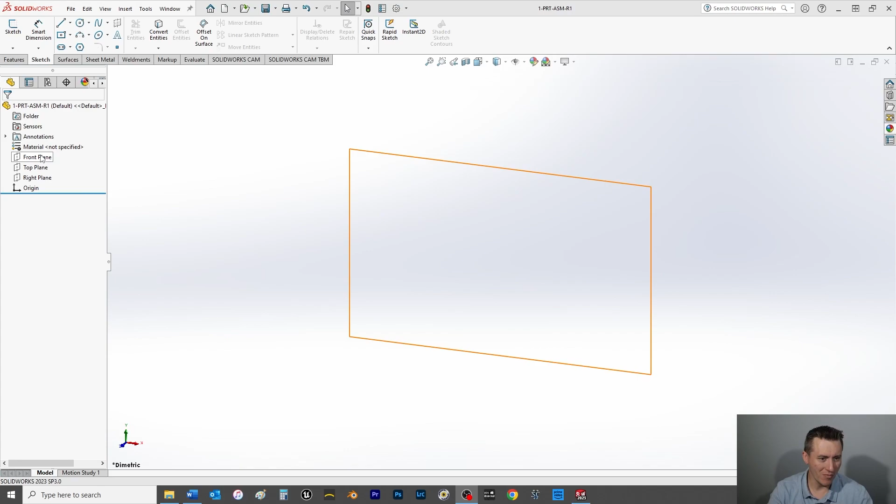For this, I'm going to choose the lovely front plane to start. This isn't going to matter for which plane I start on, because the orientation of the part really doesn't matter since it's an end-all be-all part rather than a part going into an assembly.

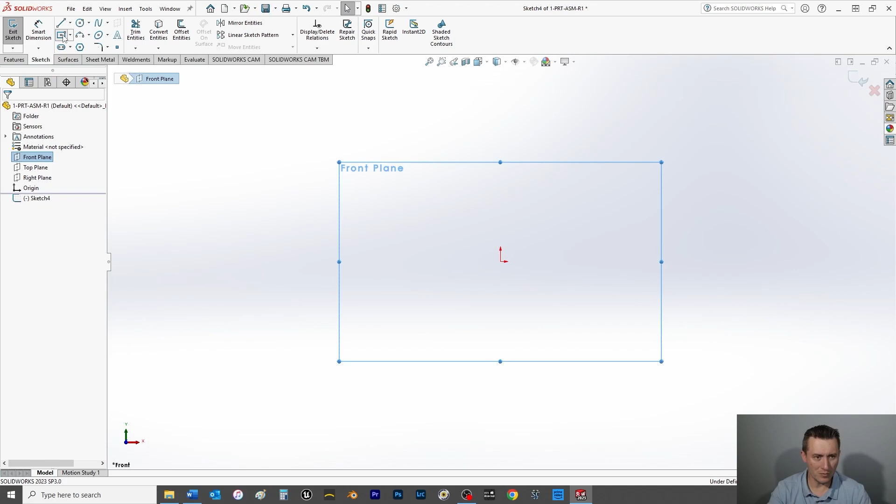So with that, we're going to start with a bounding box, or technically a cube, and we're going to choose the dimension, lucky number 7. I'm going to press the control key to make the vertical and horizontal line here equal. I love using minimal dimensions when possible.

There are other situations where it's more complex, so it doesn't quite make sense to do equal relations. You may want to do different dimensions and have them drive off of each other. There's a number of different ways to do it depending on what your part design is and what it requires, and being able to keep track of when you change this, what else is going to change, and is that change predictable to your part. That's the big thing to keep in mind when making a solid part, and even further, the assembly.

But in this case, this one is purely for fun, and arguably I don't think you'd do it this way. You'd, again, make each individual piece as its own part, and then throw it together in an assembly file. So, we got our first square part here.

We're going to turn this now into our cube or bounding box. And I'm using the term bounding loosely, because I can obviously make anything go outside of this, but we're just using it as kind of our cube frame of reference.

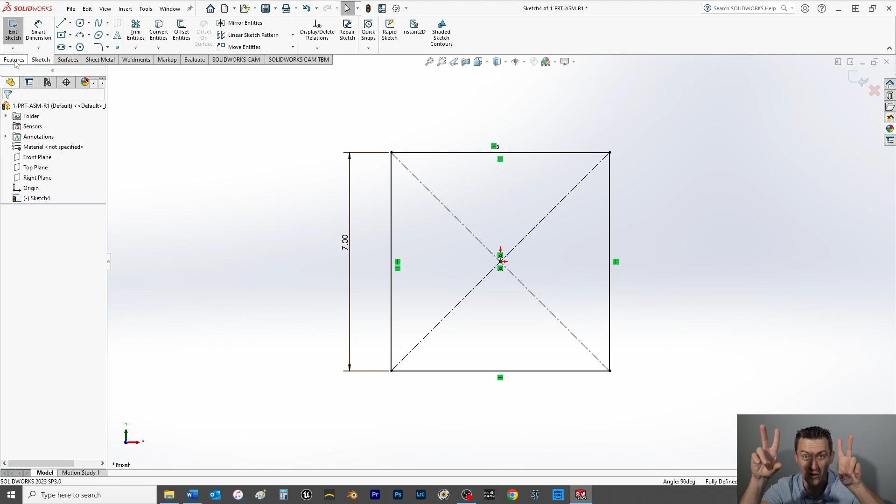So I'm going to go into the Features tab, I'm going to choose Boss Extrude. In my end condition, I want to be mid-plane. By default, it is probably going to be blind, which is okay, but I want it mid-plane because I want the center of this part on all planes, front, right, top, to be in the center. We'll do 7 here, so it's a 7 by 7 by 7.

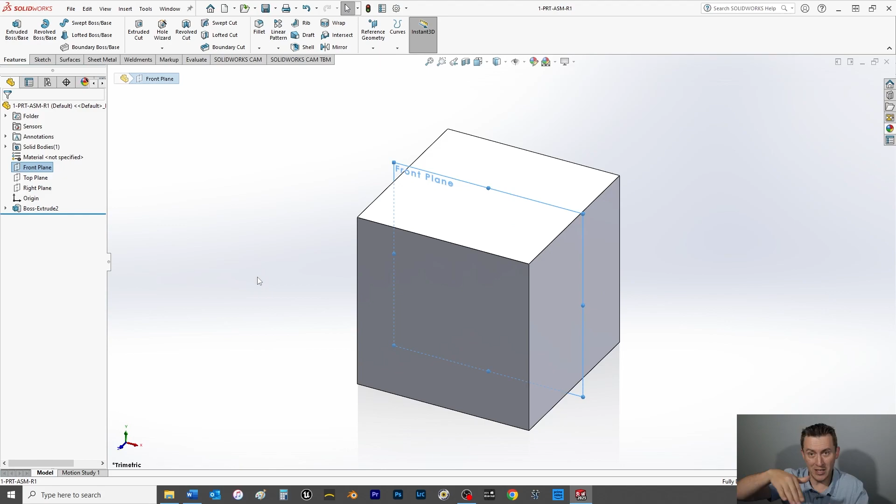Save it. And now what we're going to do from here is cut from the inside out. And we'll do that by choosing the front plane, because the front plane, the top plane, and the right plane are all technically in the middle of this cube, because of extruding it mid-plane and where I drew the sketch and the center point relation of the rectangle.

So now I'll bring the front plane, hit Control 8 to bring it normal to. Now it looks like I'm going to draw on the front face of this cube, but I assure you I'm not. So we'll go to the Sketch tab, click Sketch.

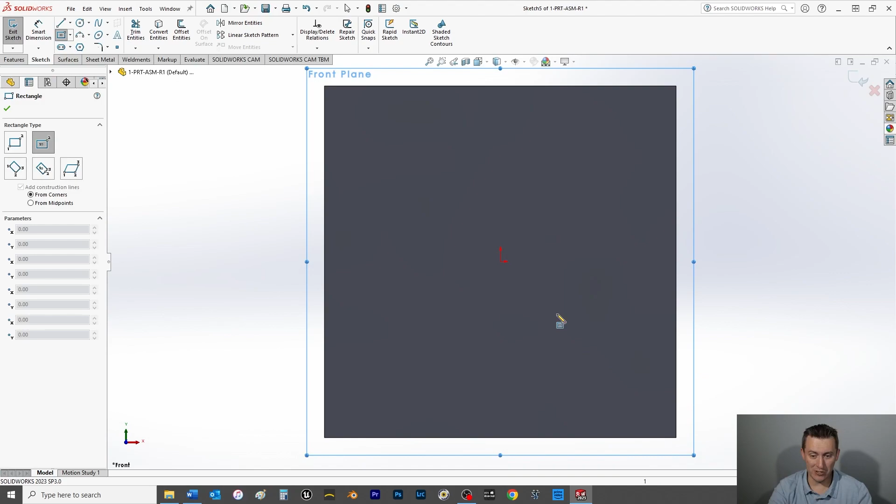We're going to choose another center rectangle. We want the origin again, want everything centered off the origin. And for here we're going to do an offset of, say, 0.375. How about that?

And again, I only want to use a single dimension to drive all of these cutouts, because we're going to have a cutout on the front plane, the top plane, and the right plane to hollow out this cube, so to speak. So what we can do is, again, our lovely control key, we'll choose this vertical line here, choose this horizontal, and then over here in the properties, under add relations, we want to choose equal.

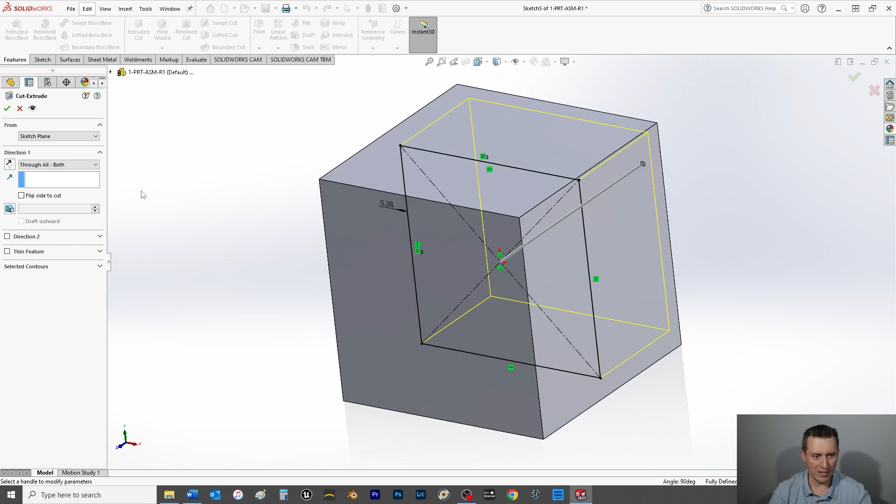Click OK, we have all black lines, a fully defined sketch. Down here in the bottom right, you'll see something that says fully defined. You want that always. Now I'm going to go into the Features tab and do an extruded cut. This is again in the middle, and I want to choose the end condition through all both, so it cuts out both sides.

There's a number of different ways you can do this, this is definitely a quick way, and I'm not concerned about what it would potentially cut through on the outside, because again, everything else I'm going to create is inside this cube.

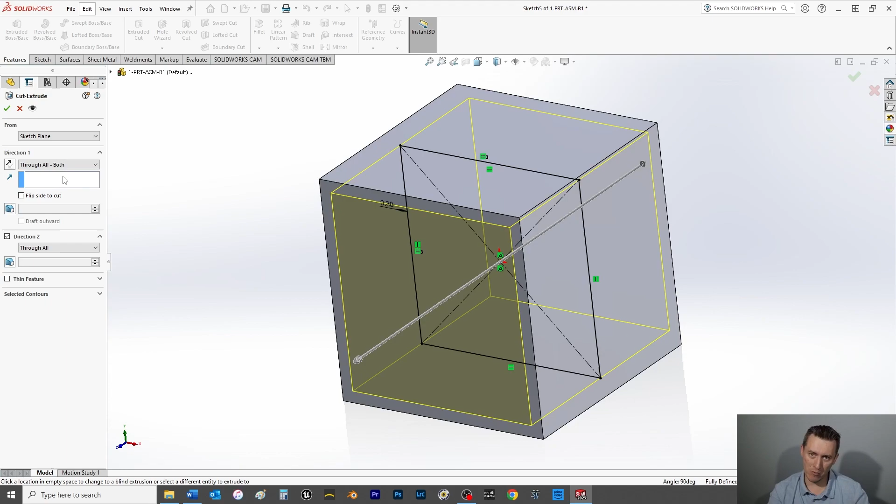Now, if you were concerned about what it may cut through on the outside, you may want to choose a different end condition, say up to surface, which is going to be highly accurate. It stops right there, goes no further, no less, right at that surface, and it will cut out that side.

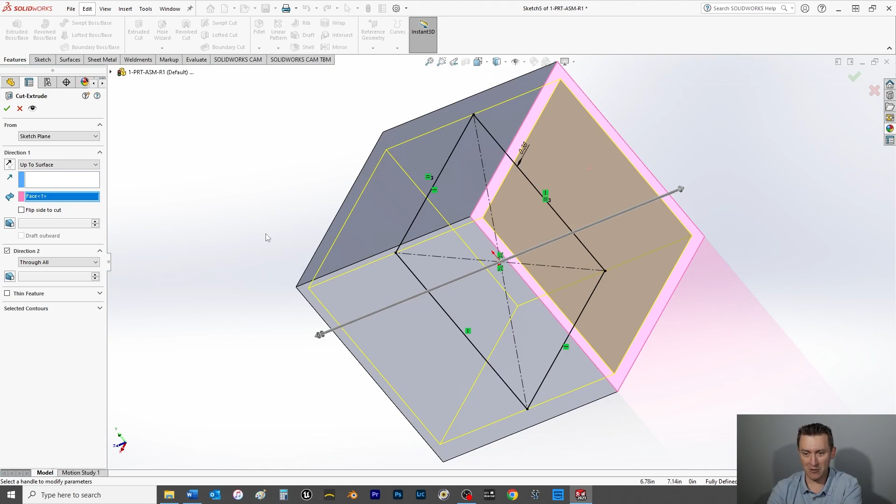When you do that, you're going to have to do one of two things: either close out and consider that one feature, then go back in and do it again going the other direction, or in this case choose direction 2, the same up to surface condition, and then choose the other side. Now it's going to cut through both sides, front and back, with one feature of cut extrude.

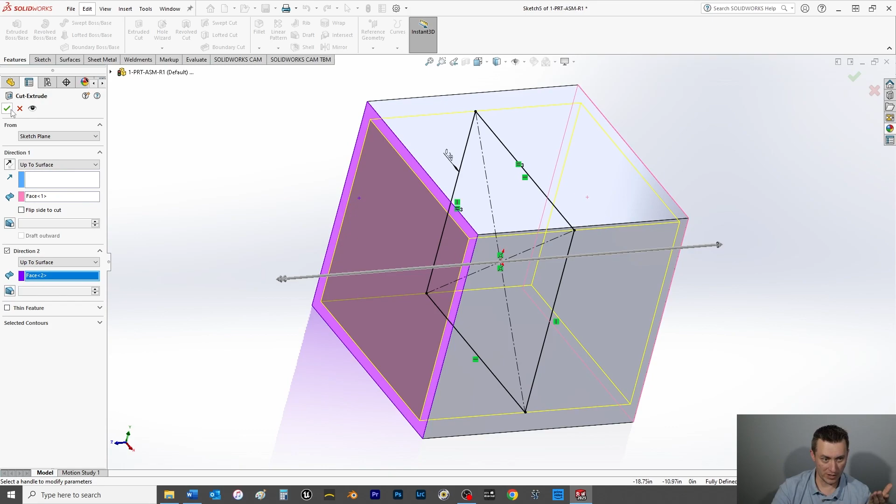So for this one, I'll do it this way just to show. I'm going to press the space bar and bring the front plane normal to. There we go, we've cut that out that way. Now I'll hit the space bar and bring it isometric.

One thing let's do here now is take the second sketch we created, which was absorbed by our cut extrude feature, and rename it. So sketch 5 here, even though it's only our second sketch, I'm going to click on it once, then slow click twice to get the rename, and we're going to call this master offset sketch, because this sketch is going to drive all the other cut extrude sketches.

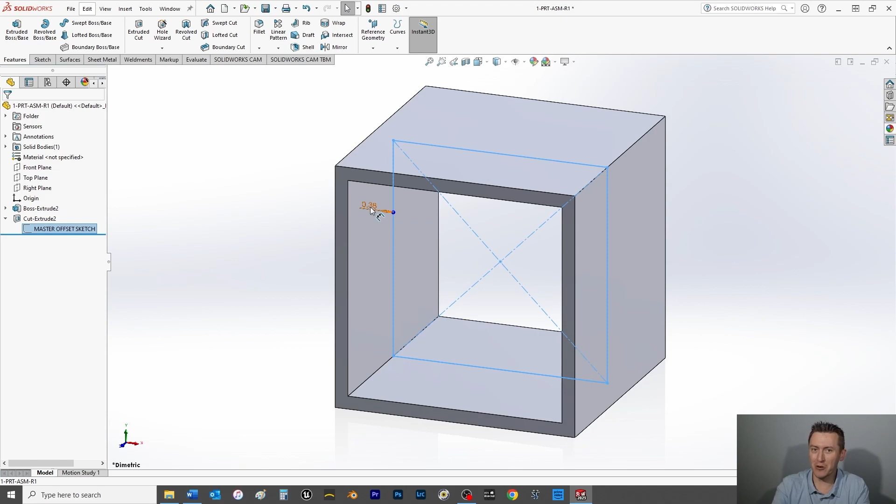That way, when I change the dimension of the cube, it drives the offset from this sketch, and everything changes proportionately and predictably. I won't have to go into each individual sketch for the cut extrude and change the dimension, even though there's one. I don't want to have to deal with that if I don't have to. So now we'll save it, of course.

And the other thing is, let's leave it hidden for now so it doesn't get too messy. Next, you can either do the right or top plane—we've got to do a sketch on both. So let's go right plane next, Control 8 to bring it normal to, then go back to our sketch tab.

Choose a center point or center rectangle, drag out, click OK. Now what I'm going to do is, while I'm in this sketch, right click over here in the features tree on my master sketch and show that sketch. So now with clicking the center scroll wheel, I can turn and manipulate the part to get a better view of that master sketch.

From here, control key again, I'm going to select that vertical line from the master sketch, and select the vertical line from my current sketch. Over here, under the relations, I want to make that equal. You can see where this is going.

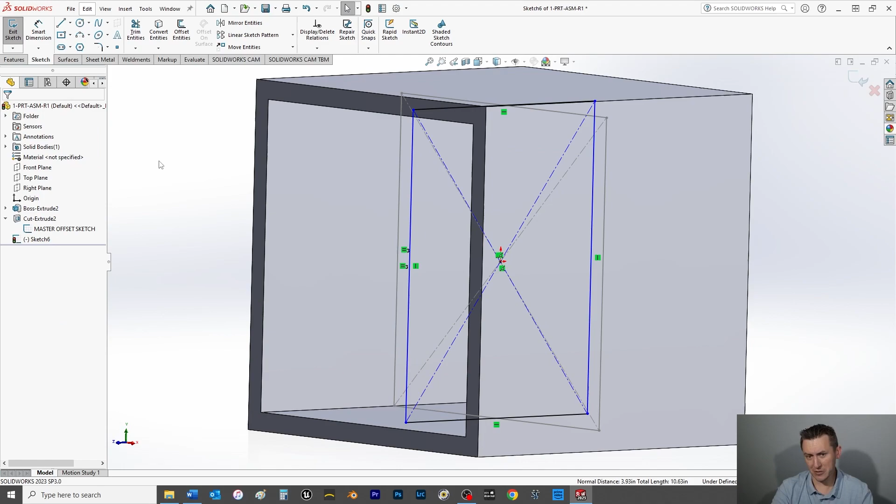Now I'm going to hit the space bar and bring my sketch normal to again, because I don't need the master sketch anymore, though you could arguably use the horizontal line of the master sketch and the horizontal line of this sketch and make those an equal relation too. I'm just going to do the exact same thing I did for the first sketch.

We've already got this one equal here. It's underdefined—there are no dimensions, this is purely relation based—but that's going to fully define it. So I'm going to press Control key, select my vertical line, select my horizontal, and again add the equal relation, then close the dialog on that. It's fully defined based on the origin, the center rectangle's parameters, and the constraints that it puts in place.

So from here, now I can do features, the extruded cut, and this time I'm going to do end condition through all both, speed it up a bit, and click OK. Just like that, we're almost done hollowing out this cube boundary box.

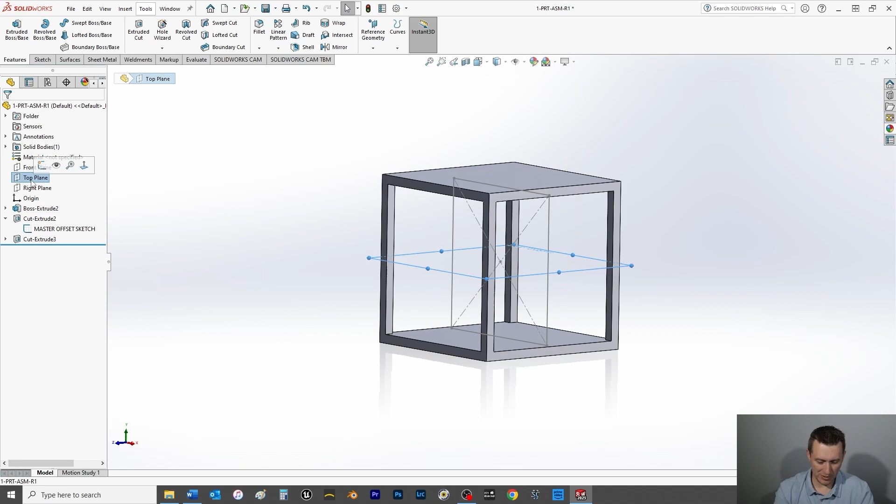So now I'm going to do the top plane, Control 8 to bring it normal to, choose a sketch, and do the center rectangle on the origin. Then here again, I'm just using my mouse wheel, pressing it in to manipulate the part's position. We're still in this sketch.

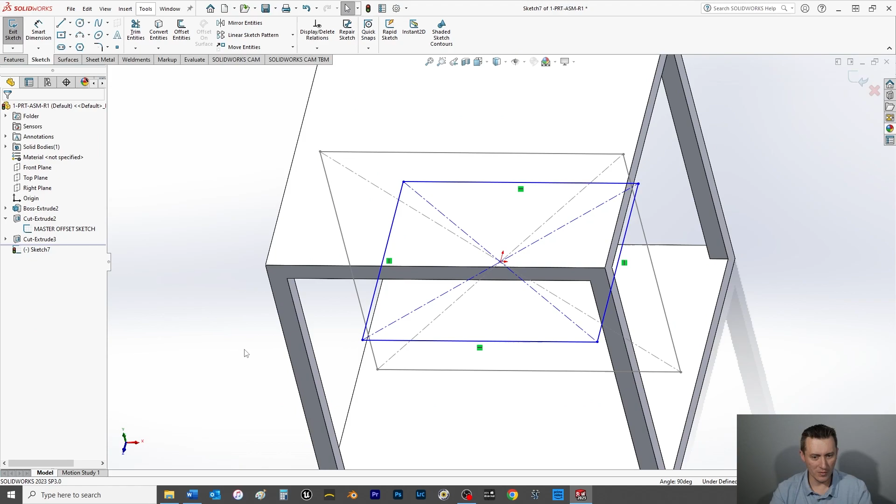I'm going to press Control, grab the master sketch vertical—oh, we grabbed everything. So Control key, grab the master sketch vertical, grab my current sketch vertical, close out of that for a moment, and edit the sketch.

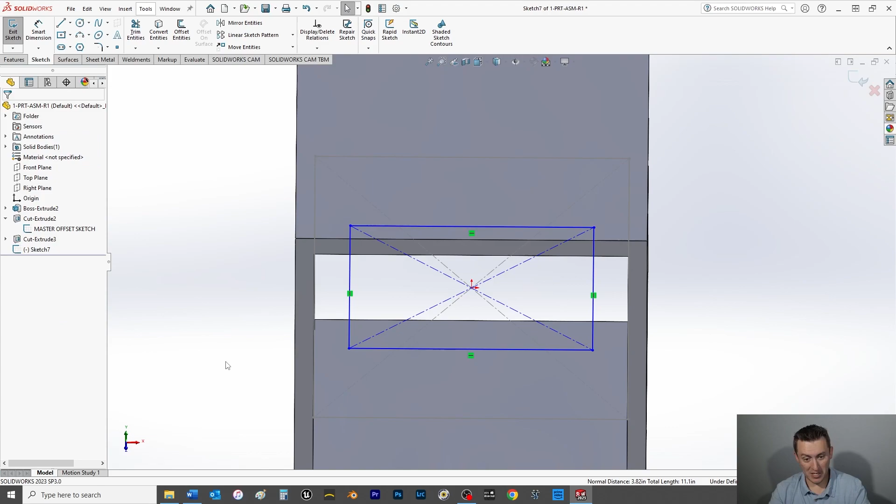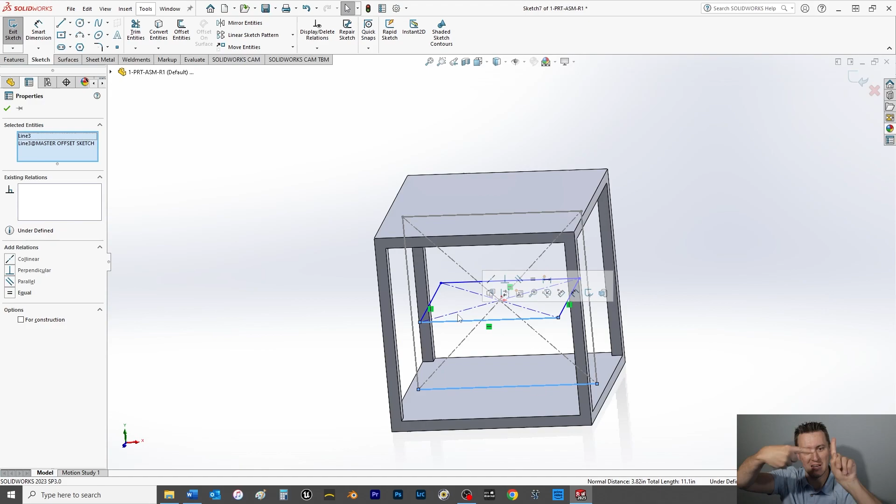So we're going to grab this horizontal here and this horizontal here. What's happening is if I try to grab this line, it's on a completely different plane, so it won't recognize it. But in this case, we can choose this bottom line of our master sketch, and then choose this horizontal line, because technically they're parallel. Perpendicular kind of freaks it out, like how am I supposed to make this equal? So we'll do an equal relation that way.

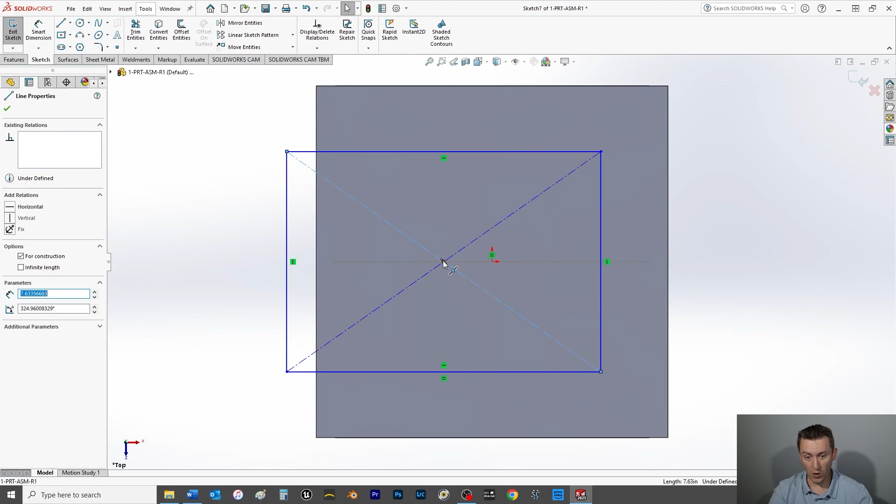From here, I can go back normal to. Now notice the center of this rectangle is not on the origin. So I'll grab the center point of one of these diagonal lines, control click on my origin, hit coincident, and that way we're back on center.

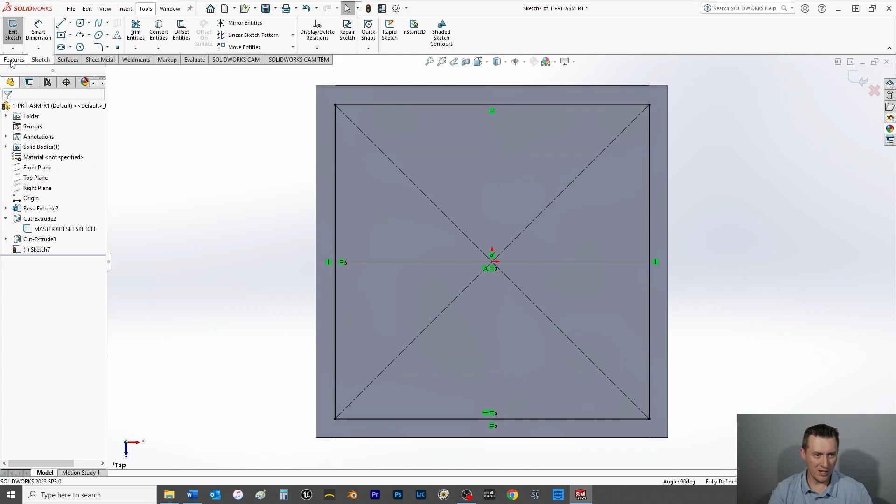Then I'll press the control key again, choose my vertical line and my horizontal line, hit equal, boom, fully defined. Go to the Features tab, do an extruded cut, make sure we're on through all both, and hit OK. From here, over in my features tree, I can right click and hide my master sketch.

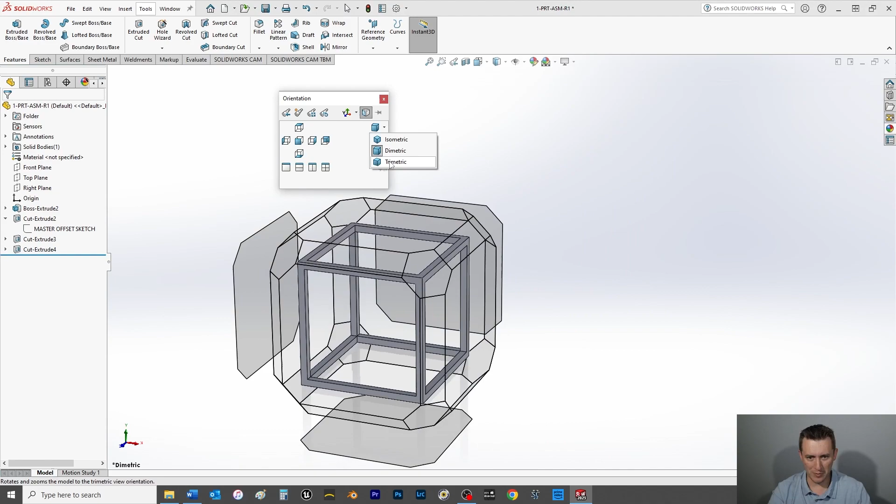I'll hit the space bar and bring it back. I have this in dimetric, which you can change from this dropdown. There's isometric, which should be the default. So now we've got the bounding box.

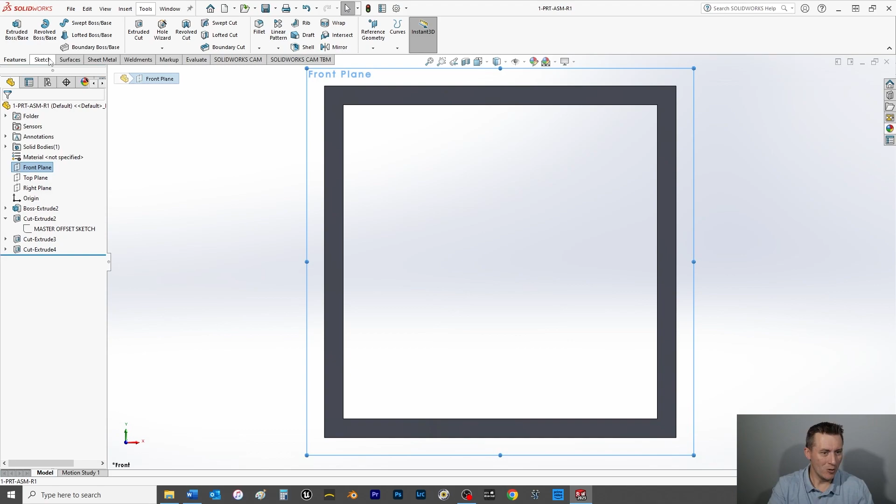So the next thing I'm going to do, how about a sphere? Let's go back to our front plane again. We're inside it, because the front plane is in the middle. We'll start another sketch here, and this time we're going to start with a midpoint line, origin, everything centered on the origin. Let's do 1.5 for this.

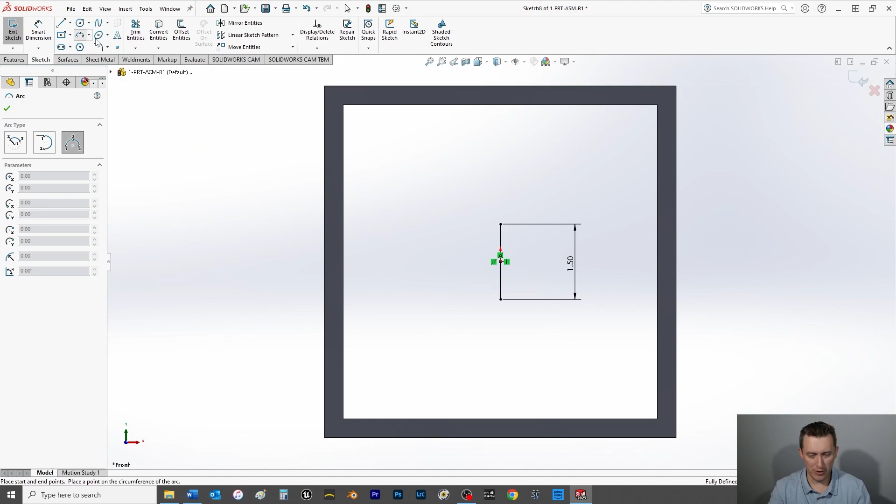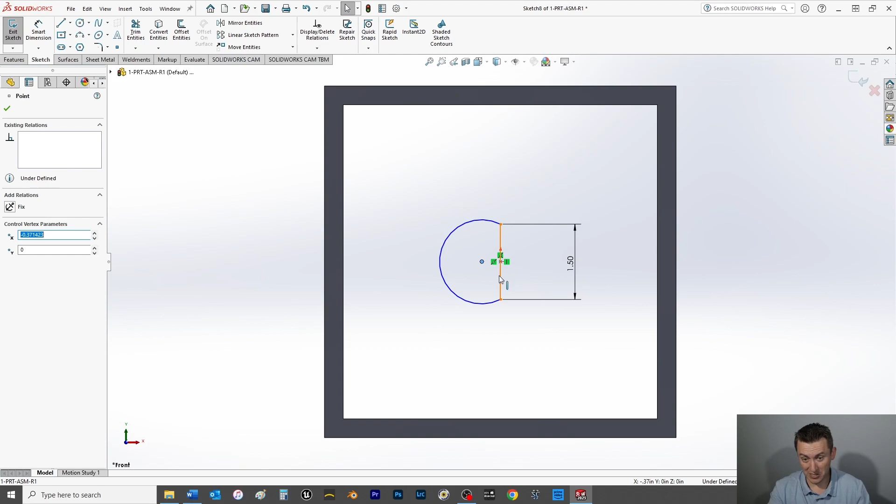And then we'll start a 3-point arc using that line as the endpoints. Here you can see there's a little white box with an angular icon. If we select that, it says it's 180 degrees. Now the center point of this arc, I'm going to drag it out, and pressing the control key since I've already selected it, I'll select my midpoint line and choose a midpoint relation. That fully defines this.

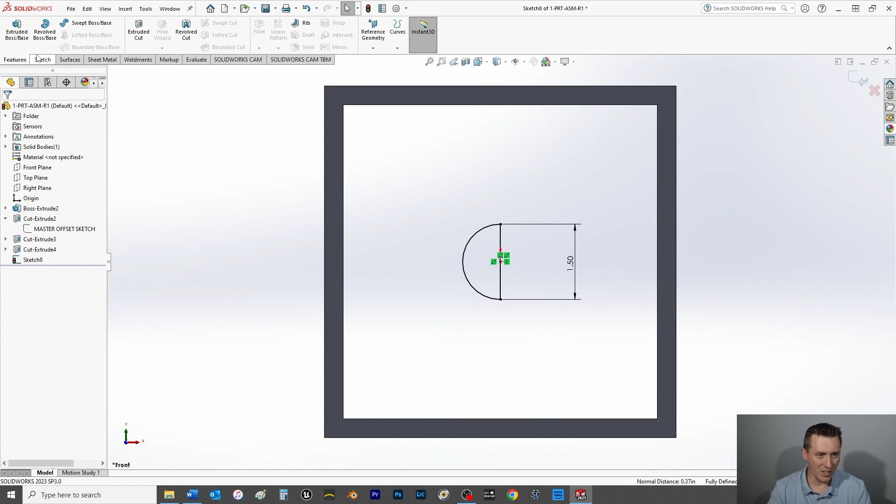Otherwise you could choose to make this with a radius of half of 1.5, not necessary. Again, if I can minimize the dimensions I have to put into something, great, do it. Now from here, I'm going to go to the Features tab and do a Revolve Boss Base, and press the center scroll wheel to show the direction of rotation. I have it set to 360. I need a center axis of rotation, which would be this line here, and boom, we got a sphere. So already we've got two different shapes, and this is one solid part. This is not an assembly.

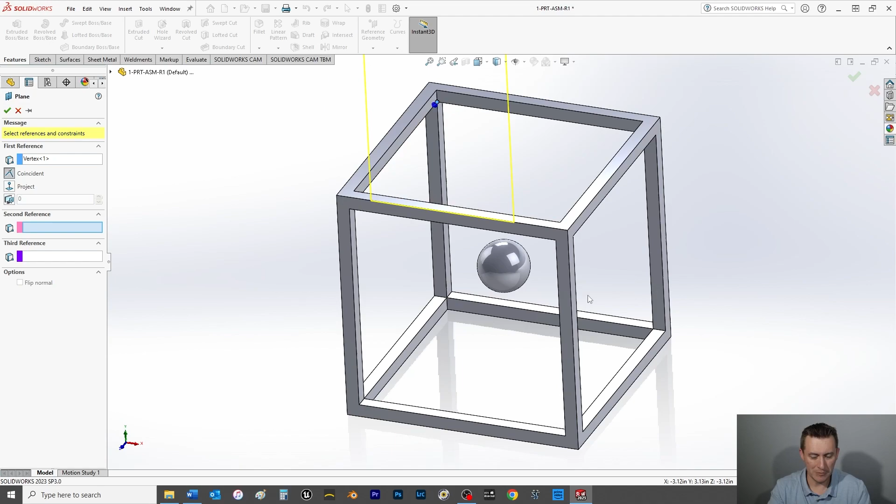So hit save, and now we're going to do some really crazy geometry here. The first thing I'm going to do is make sure I'm under the Features tab, and do a reference geometry plane, and choose 3 vertex points. I'm going to choose this corner here on the inside, over here on the inside, and then down here on the bottom. Bring it in, and boom, fully defined over here on the left. Good to go.

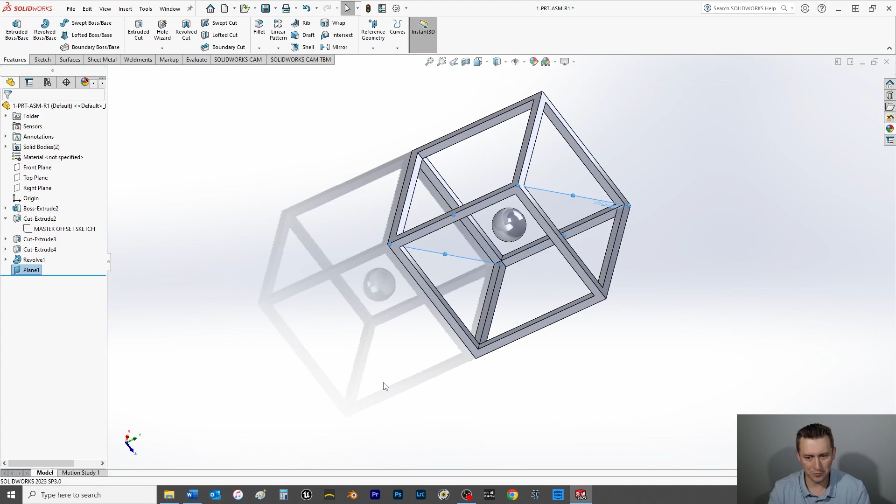Now I'm going to go to the front plane to show you, sorry, let me go isometric. So you can see that this plane is technically at a 45 degree on the center. There's a couple different ways you can do it. You can do it based on an axis in the center of that sphere, but I want to do the 3-point reference. There's different reasons why you'd choose what you do for a plane reference. Again, because you want predictable change to happen, and depending on how your plane is referenced, it may change dramatically and unpredictably, so it's something to keep in mind.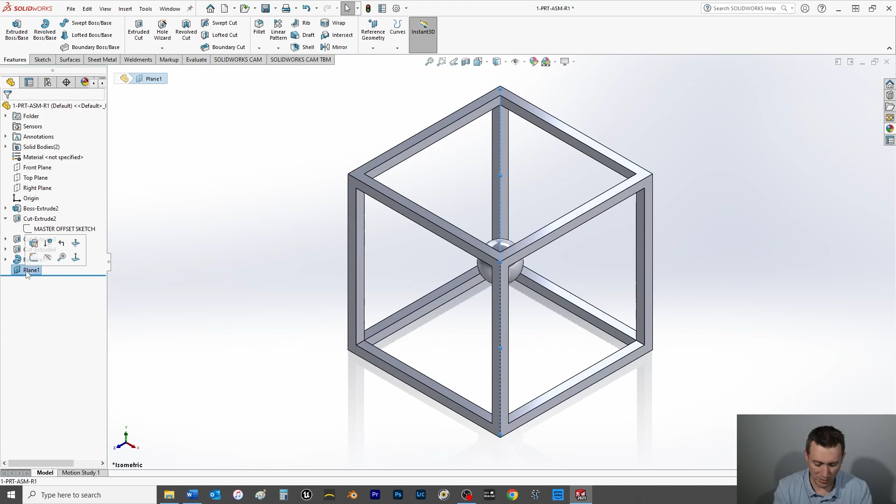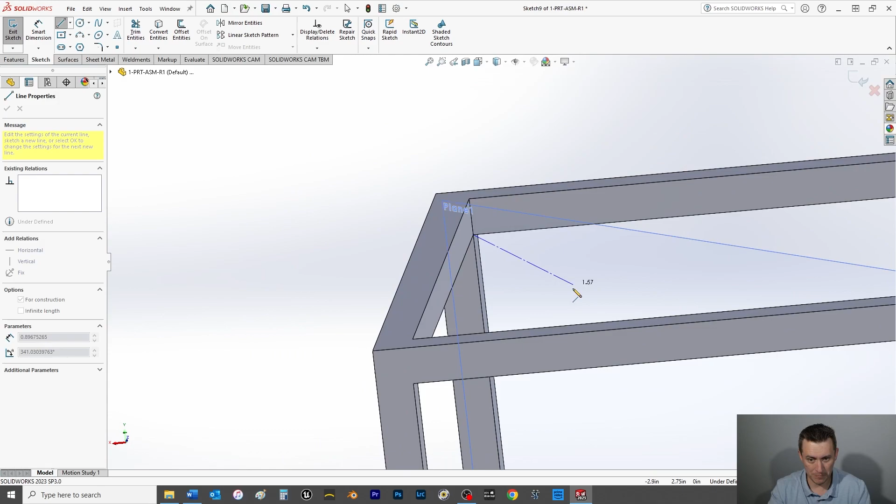So now I'm going to take and select plane 1 and bring that normal to, which makes this a diagonal, funky view here. I'm going to choose a sketch, and choose a center line, which I also consider a construction line. Then I'm going to choose this corner here, but more specifically I want to be on the inside because I want to choose this corner here. Then I want to choose the origin, right click and select, then hit the space bar and bring that normal to for you again here.

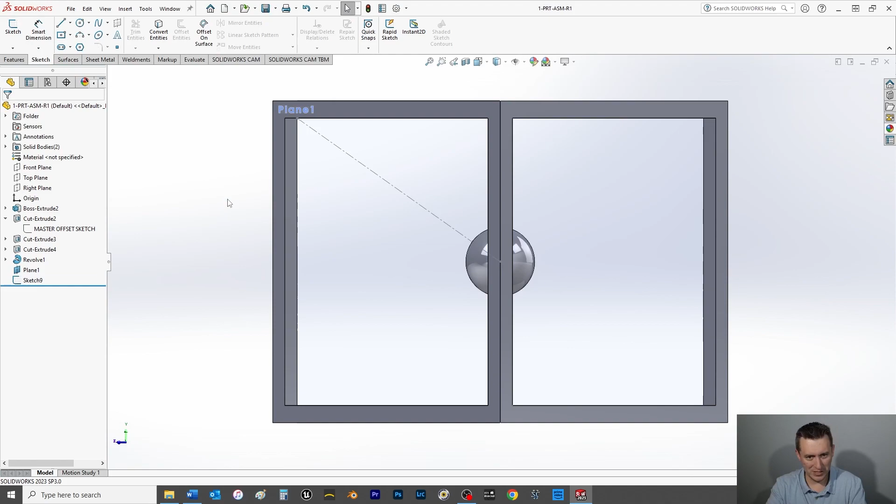Again, this is just a reference line for sanity, I'm not going to use it for anything else. So we can exit out of that, hit save, and then rotate this here.

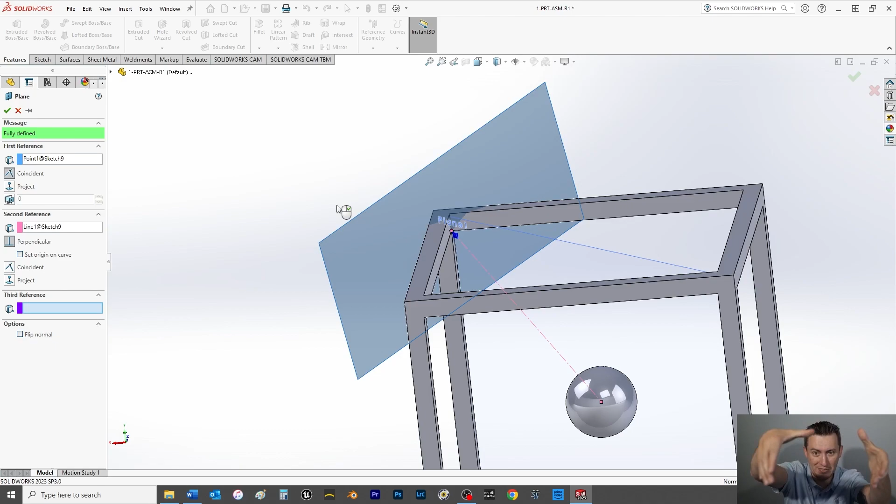Then I'm going to make another plane using reference geometry, choose a plane. I want to grab this vertex of the line I just made and the line itself - this is what that line was created for - so I can create this reference plane here. Fully defined, so I'll click OK.

I'm now going to right click on plane 1 and hide it, I don't need it anymore. Plane 2 is my focus now, so select plane 2 from the feature tree or graphics area, and Control 8 to bring it normal to.

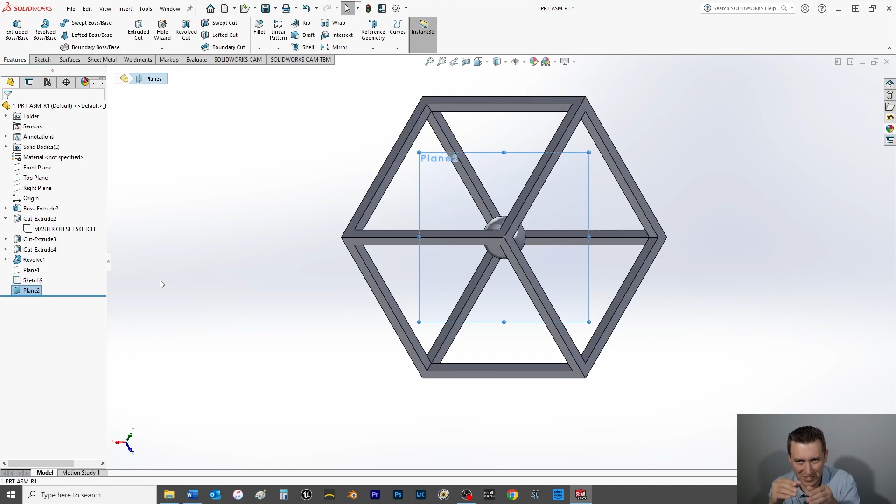Now things are going to get confusing because it's like, alright, where is this thing going to be? So, plane 2 is right at this point against this. From here, I'll make another sketch and create a circle.

I'm going to draw it out here, away from where it's intended to be, and give it a dimension of say 1/4 inch, 0.25. Then we can click OK to close out.

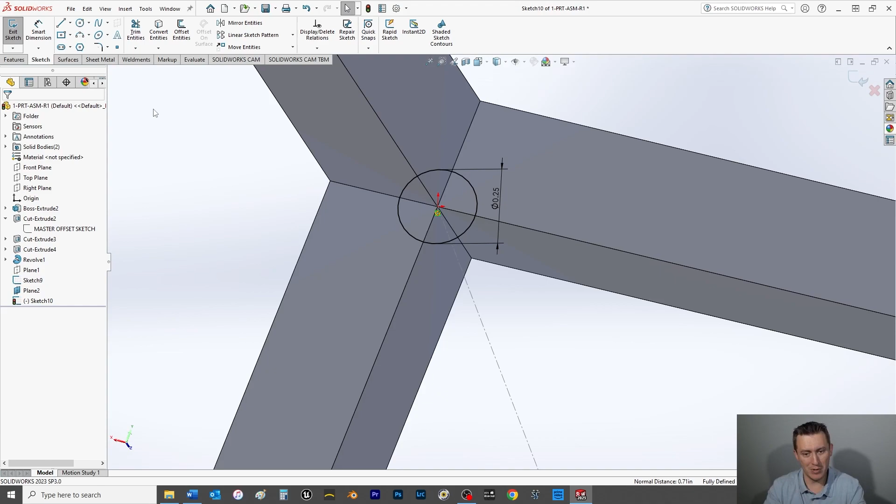Control key again, selecting the center of the circle, and now I'm going to select this line and choose a pierce relation. I'm not going to use this circle as a boss sweep along that line - that's what you'd kind of use the pierce for, it has a number of different reasons why you'd choose that relation. I'm just using it to get this circle on that plane exactly in the center of this corner joining point of my bounding box for the extrusion.

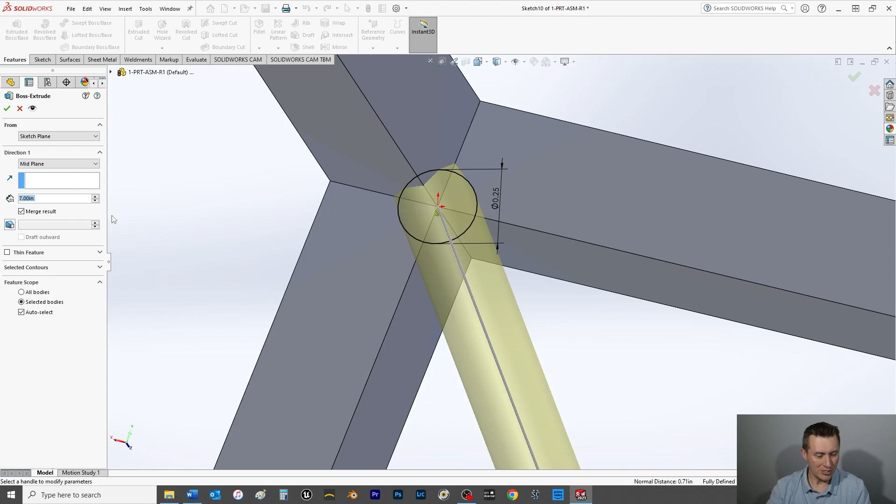Now we can go into the features, and I'm going to use one extrusion feature for this in 2 different directions. We don't want mid-plane, so first I'll do a blind condition, switch the direction, and make this point 0.125, and let's go 0.1875. Just want to make sure we're going right.

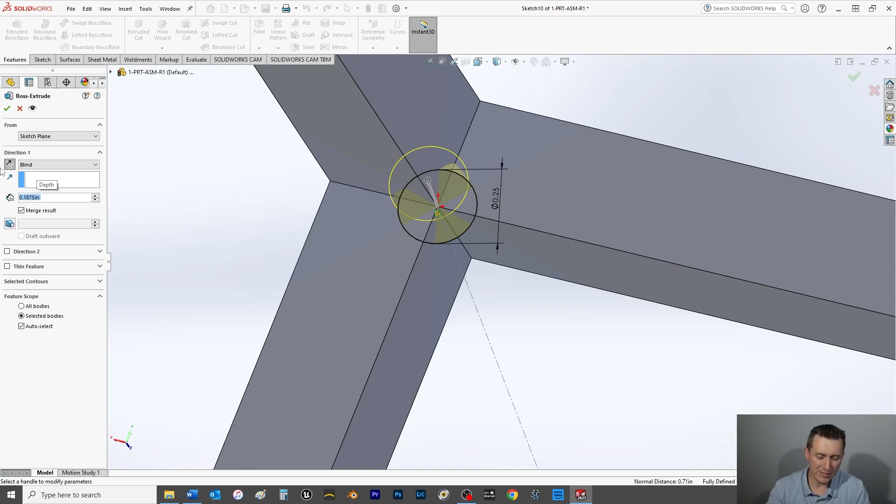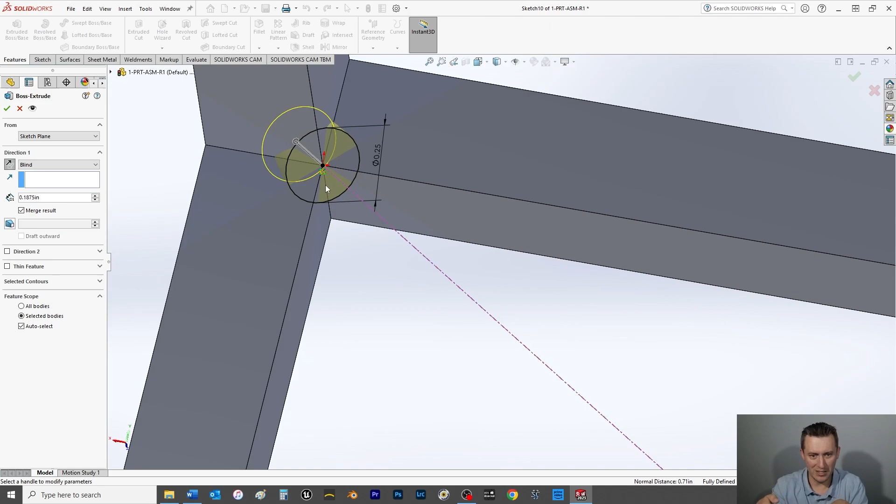Now I'm being lazy because what's happening is I'm extruding this far enough to where it's going inside my bounding box. Otherwise, if we were going to do an up to surface method, I'd literally have to create a bunch of pie cut reference geometry and individually extrude up to surface depending. So I'm just going to speed it up that way.

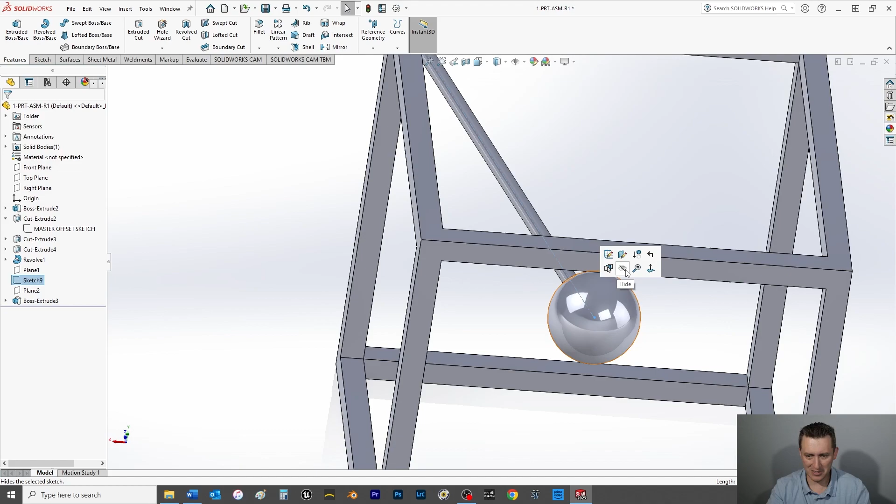Now direction 2's end condition is going to be up to surface, and I just want it to smack into the sphere here, and we'll call it good on that. Control S, and we're going to hide this. I'm also going to hide this reference construction line, no longer needed.

Let's go to our front view for a moment, see how we are. So we have this thus far. Now we don't need to go through that entire process again - all we're going to do is on the front plane, start a sketch.

I'm creating an axis of rotation for this, from here to here within the sphere, fully defined. We're going to exit this.

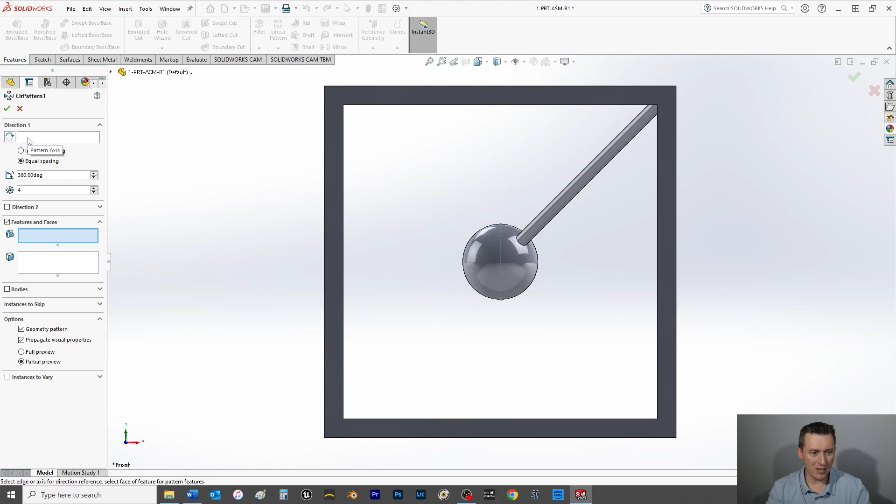We're now going to go into the Features tab, find Linear Pattern, come down and choose Circular Pattern. In the box where it says Pattern Axis, click like a million times - we're going to choose that axis that we did. We want 4 instances for this.

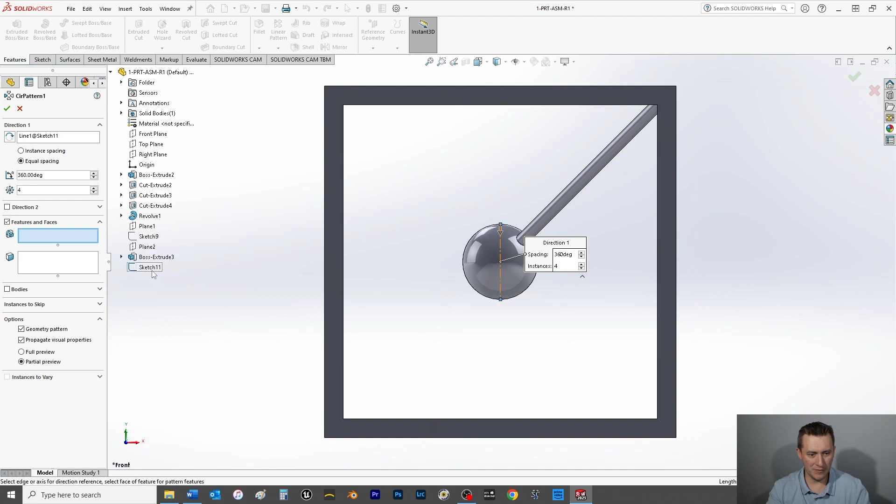Then down here in our Features and Faces area, we're going to select in here for the feature. In the graphics view, you'll have the little down arrow for the flyout feature tree - we're going to choose the boss extrude and simply click OK. And boom, we're halfway done with these particular features.

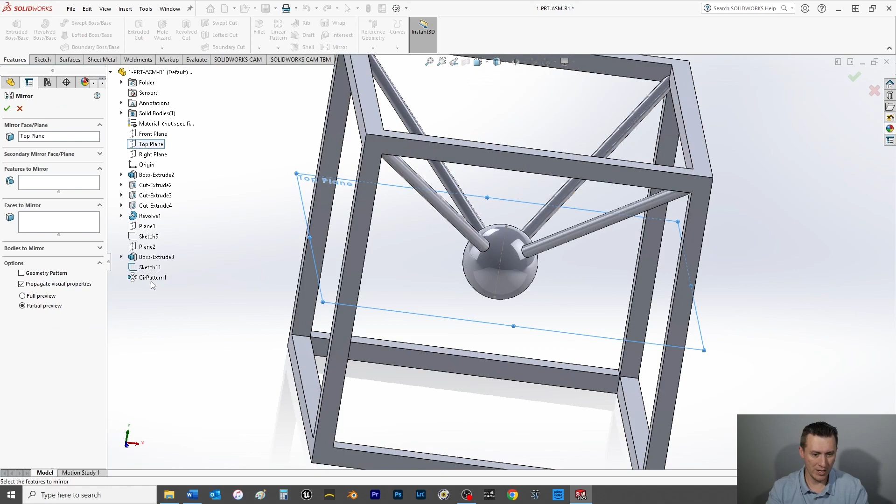Now I'm going to choose the top plane. Still under the Features tab, over here we're going to choose Mirror, select the circular pattern, and click OK. Just like that - we did all of that off of just one feature, just a pattern and then a mirror. So we'll hit save.

And then we'll hide that axis. And then let's make this a little bit more fancy - here's what I'm going to do for this.

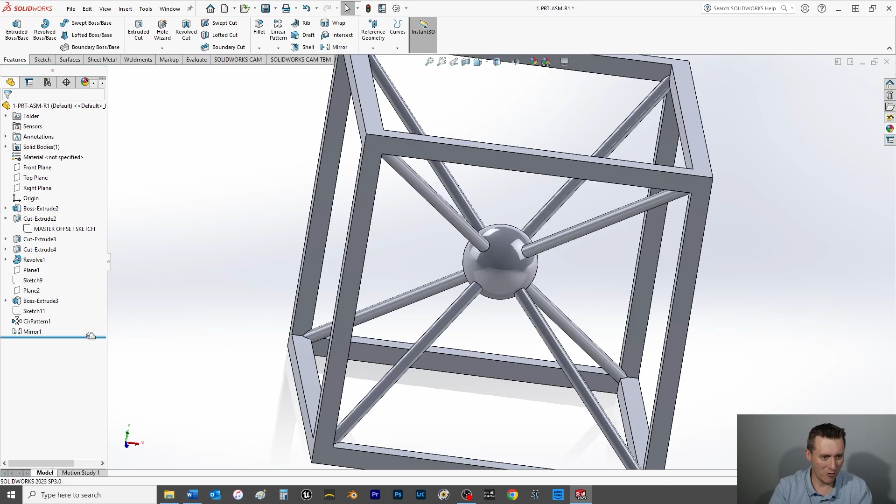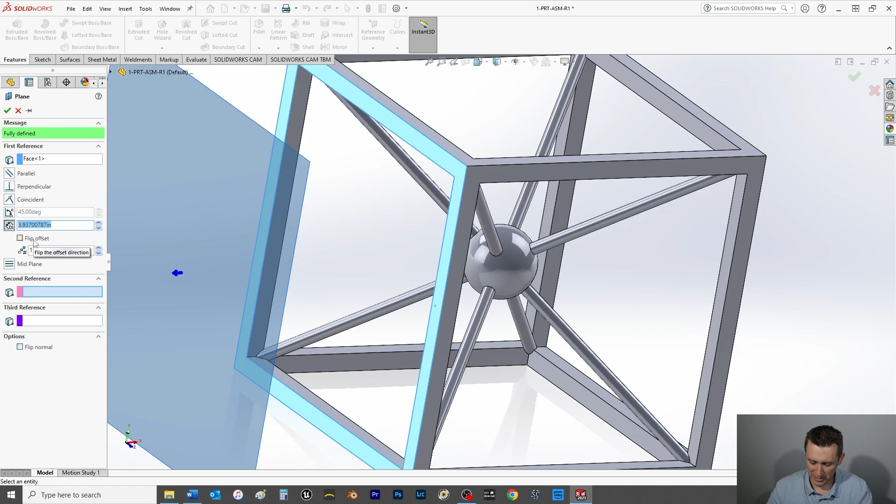I'm going to choose this outside surface, and then choose a reference geometry, and we're going to do 3.5 minus 1.5, 2 divided by 2. And we're going to flip the offset.

Then I'm going to choose Control 8 for normal to on that sketch plane. I'm going to go into sketch and create a rectangle. Again, I want it on that origin.

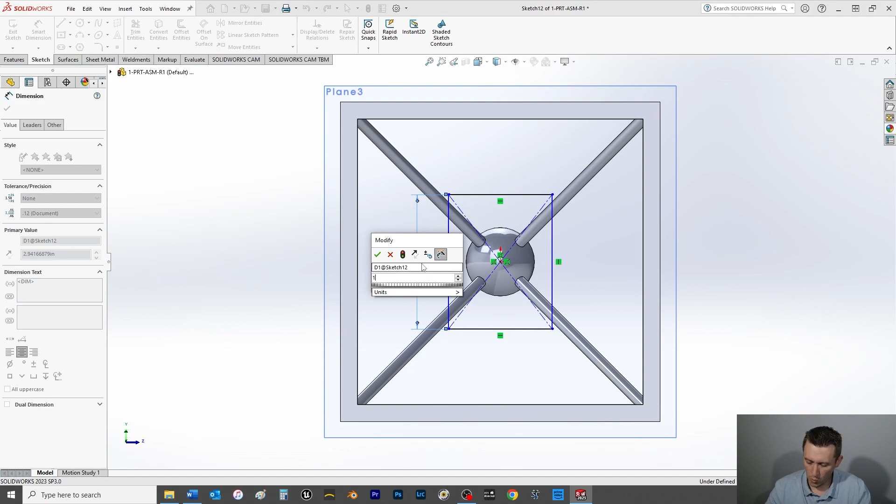And I'm just going to infinitely drag out, and we're going to choose 1.25 for this dimension. We're going to choose this line, horizontal and vertical lines, and make those equal - again, single dimensions wherever possible. I'm going to exit the sketch.

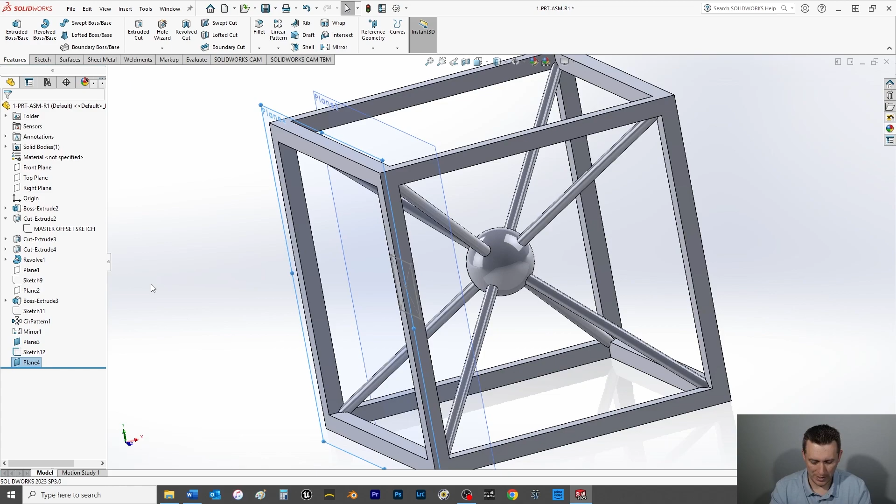I'll click this outer surface again and do another reference plane, choosing 0 offset on this, then Control 8 to bring it normal to. Then I'll go back to my sketch and choose a point right on the origin, Rudolph's nose right here. We'll close the dialog, unselect point, exit the sketch, Control S again.

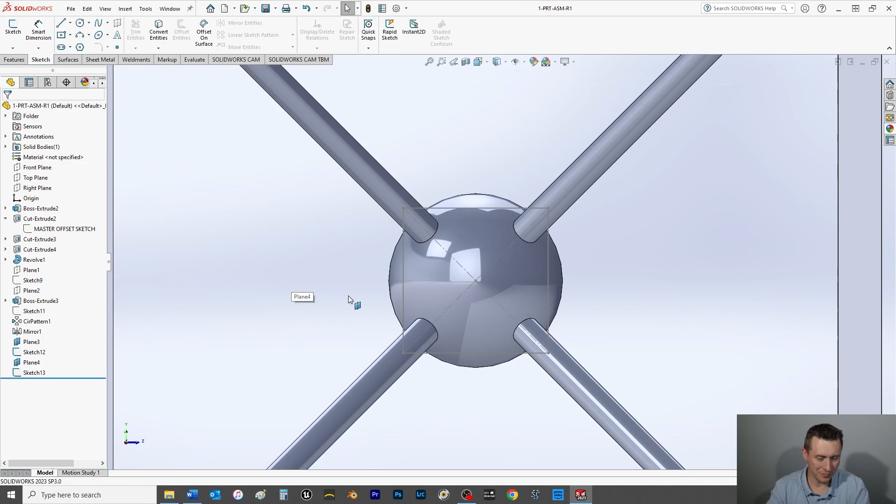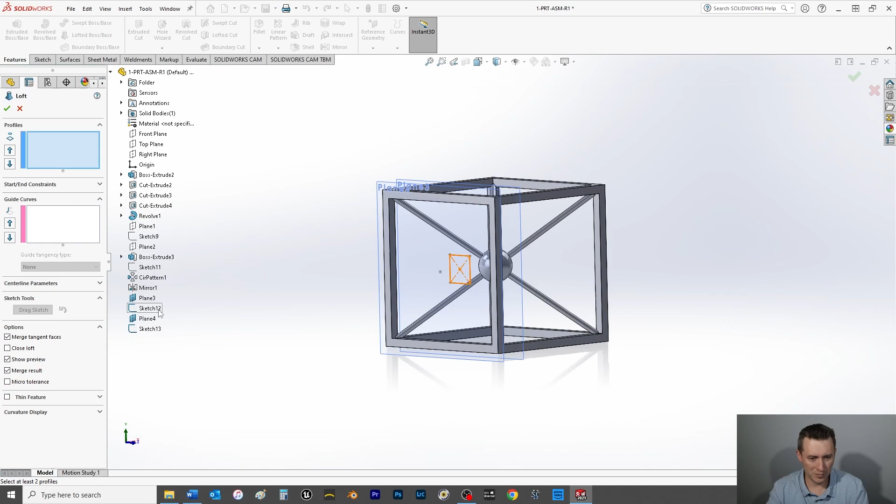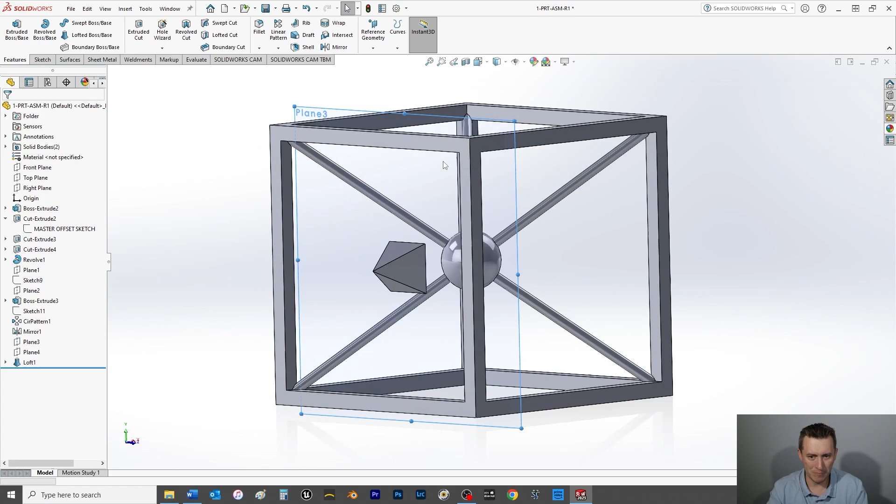I'll tilt this to the side so you can watch this awesome feature. We'll go to our Features tab and choose our base sketch, sketch 12 - in your case the numbering may be different. So we're going to do a lofted boss base, and in my flyout I want this previous base sketch, sketch 12, and sketch 13, which was that singular point, because I wanted to make this pyramid.

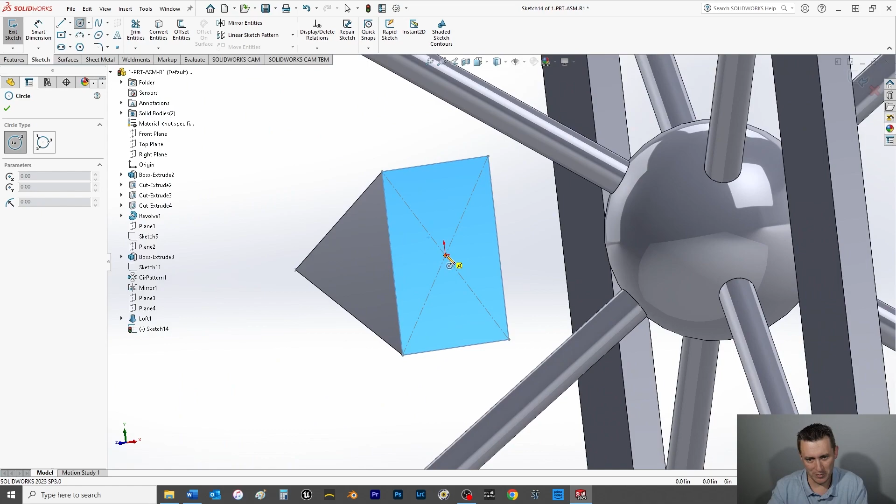From here I'm going to hide both these planes, save it, rotate the part around with my center scroll wheel pressed down, select the back side of this pyramid, choose sketch on it, and then choose a circle. I'm comfortable with the orientation, but Control 8 to bring it normal to if you're confused. The sphere is in your way, so rely on the fact that everything is centered on the origin. Center of the circle should be the origin, and you know it's going to be on that face.

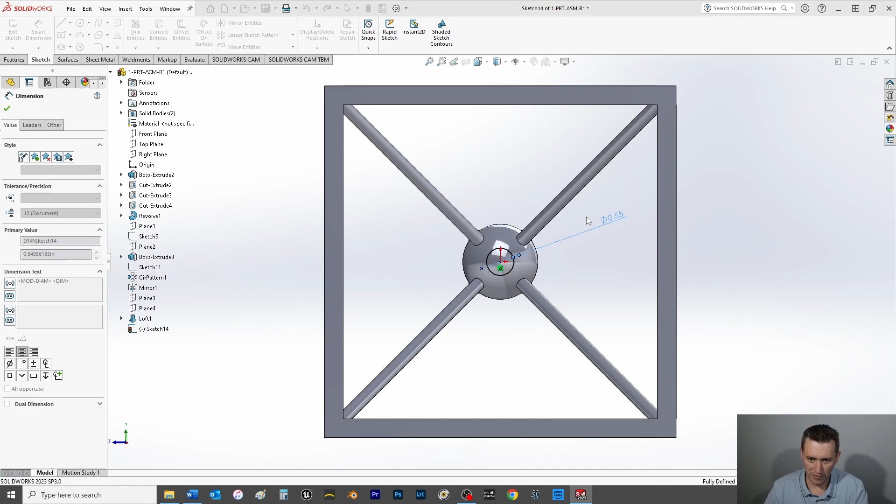So from here I'm going to choose a dimension, again 0.25 for the pipe, the circular structure lattice we've got going on here. Then going to do a boss - single direction, up to surface. Now I'll click and center scroll wheel to bring it around, choose the sphere, and select OK. Now we're making something pretty crazy here, pretty artistic.

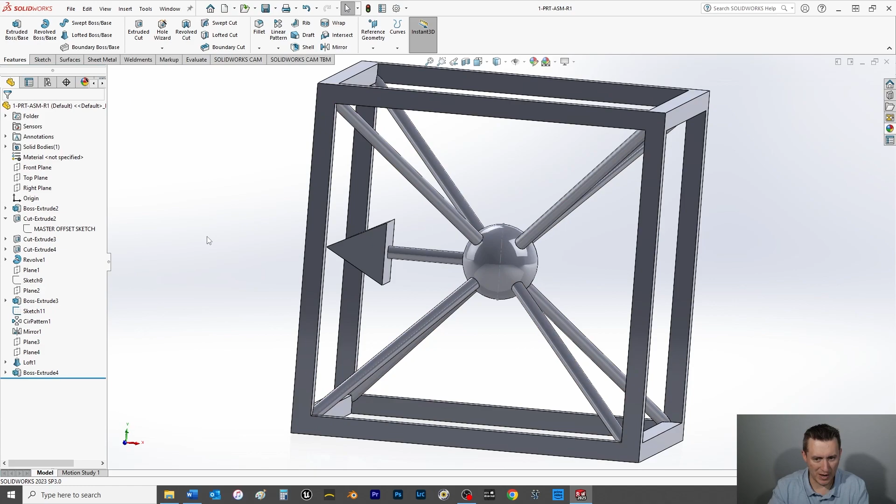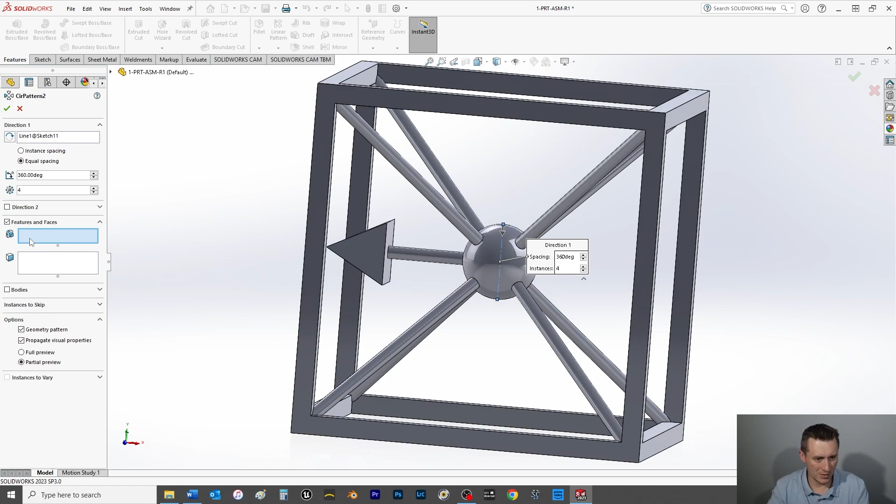From here I will finish up with a few things, which is bring this axis sketch back. Again under the features, do a circular pattern. I want to choose this axis, features, and grab these. Click OK. Beautiful. Save that.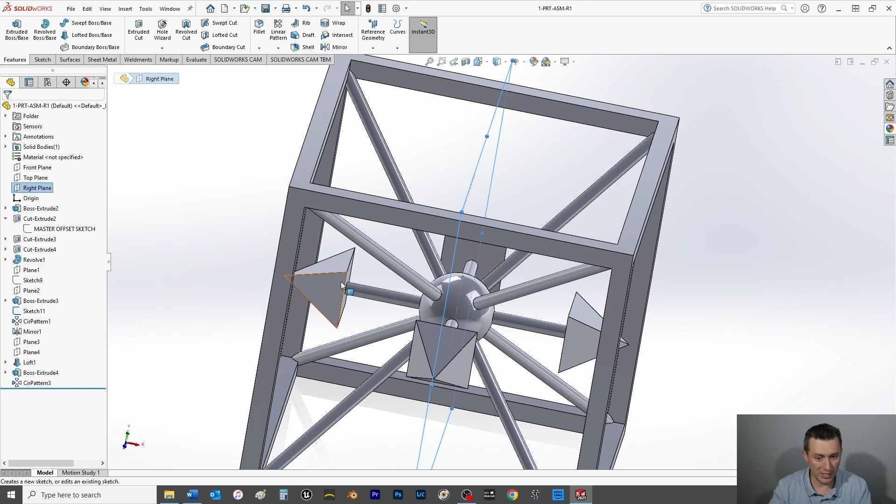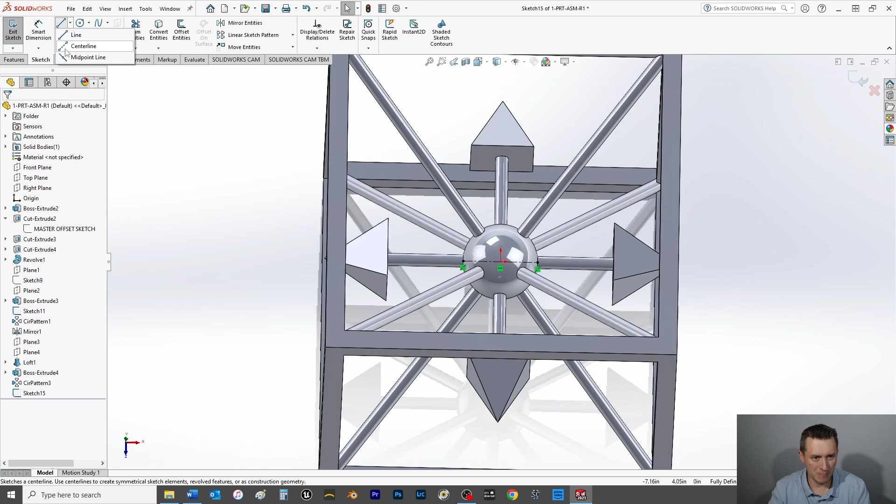Now I'm going to go to my right plane - actually we'll go top plane. So top plane, do a sketch. We'll do a center line here, another axis. Let's fix that - we want it this way because I need to choose that origin, spacebar, normal to. Oops, not that way. Edit the sketch, bring it normal to, clear this out because we're not going to need that. Let's not confuse ourselves on axis.

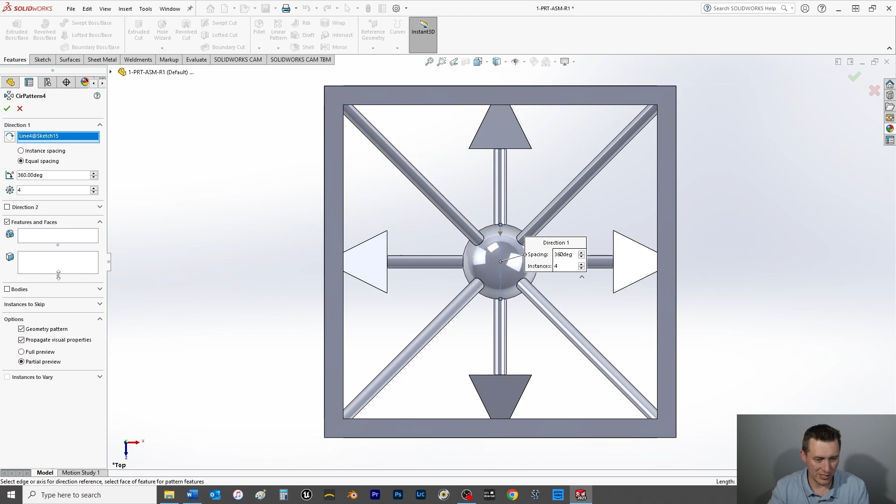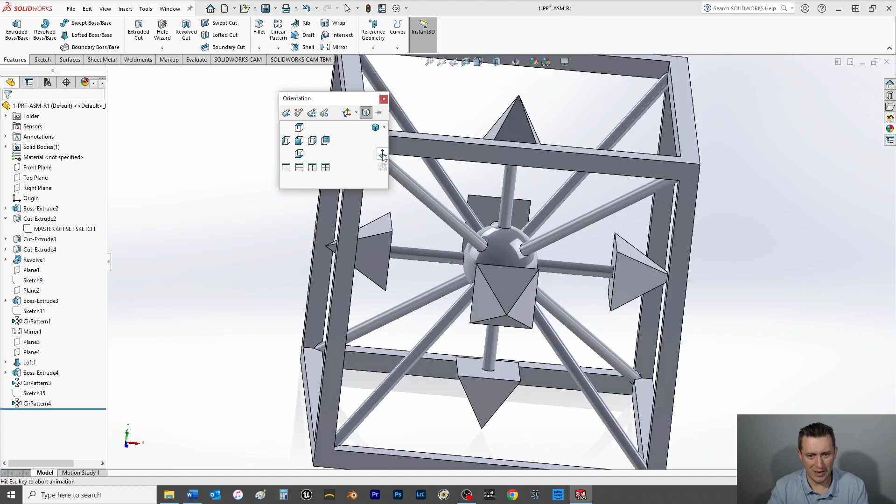Now we'll go features, another circular pattern. We'll choose this axis - check this out, 4 instances still. Go to our flyout, choose the same loft boss extrude. Now I'm going to do instance to skip because we already have this one here. We'll hide these reference axes, no longer needed. And there we have it - we have ourselves kind of what would be an assembly, but all made in one part here.

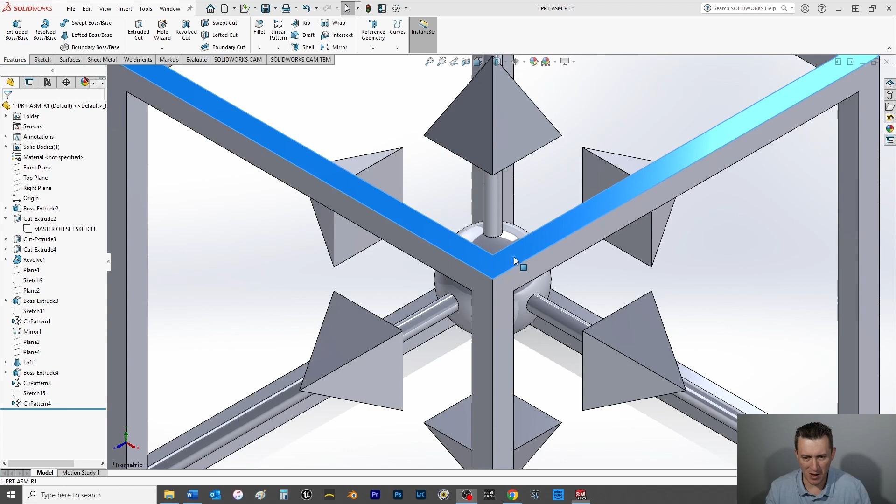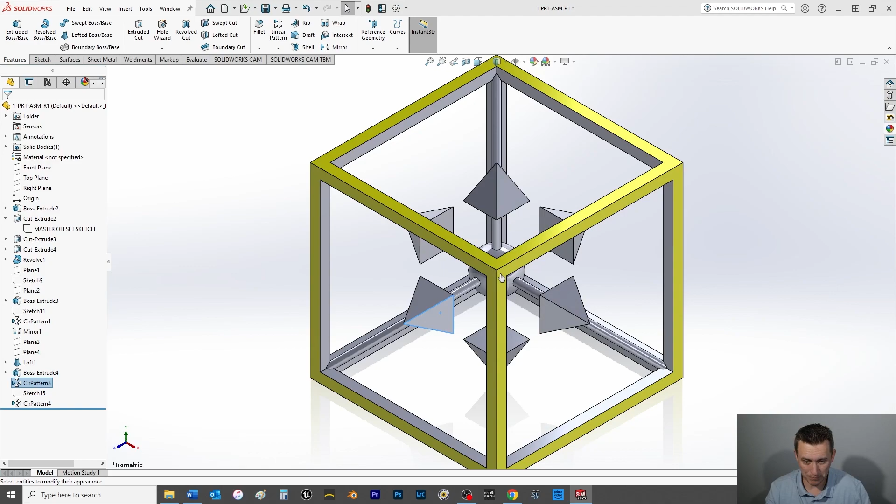Alright, as one added bonus, let's throw in some color to this part here. So let's just start with the bounding box cube here - right click, choose the appearance, choose the face, and we'll select this yellow here. Now I'm going to fly through this. The same thing applies, right? I'll click OK real quick and show you that. Let's make the pyramid faces - again appearance, choose face, and we'll make that red, and that would apply to these faces here, and so on. So we'll fly through this and catch up in 2 seconds.

And just like that, we are done.